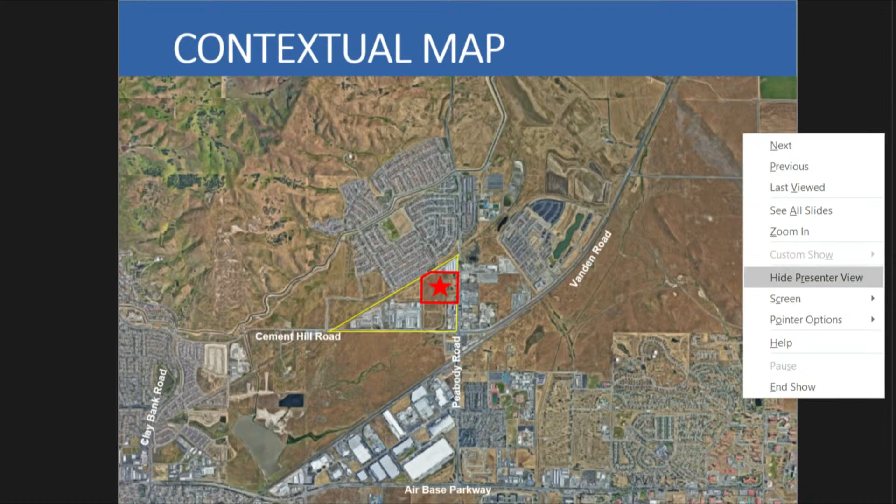I'll go to the next one. Here on the contextual map, you can have a better idea of where we are located in the city. You have Clay Bank Road on the left side of your screen, Cement Hill Road running along the yellow line there, and then you have Peabody Road running vertical up the center of the screen. Here we are, and Air Base Parkway on the south end.

Some key markers for you: the new train station that just opened, the Fairfield Vacaville train station, is at this corner of Peabody and Vanden. There is the new One Lake Park that's just recently constructed. Additionally, you have Vanden High School and Golden West Middle School. On the bottom of the screen, there's the Parker Road restaurants. And then, of course, just off screen, we have Travis Air Force Base.

Before starting the presentation, I wanted to provide a slide of acronyms, since I'll be using a lot of them this evening. I did this for you guys two weeks ago, hopefully it was helpful. So just a few on the screen there: TSSP for Train Station Specific Plan, PA for Planning Area, MPUD for Master Plan Unit Development, and EIR for Environmental Impact Report.

Before jumping into the project details, I'd like to give a brief summary of the Train Station Specific Plan project as a whole. I mentioned a lot of this information at the last Planning Commission meeting where the Commission approved the PA1 MPUD permit, but just to make sure we have a good foundation, I'll do a very quick overview.

The Train Station Specific Plan is a master plan for approximately 3,000 acres in the northeast area of the city. The plan was approved by City Council in July of 2011. Concurrent with the adoption, the Council also certified an EIR that evaluated resource impacts for the entire project, such as traffic, wetlands, biological habitat features, and more.

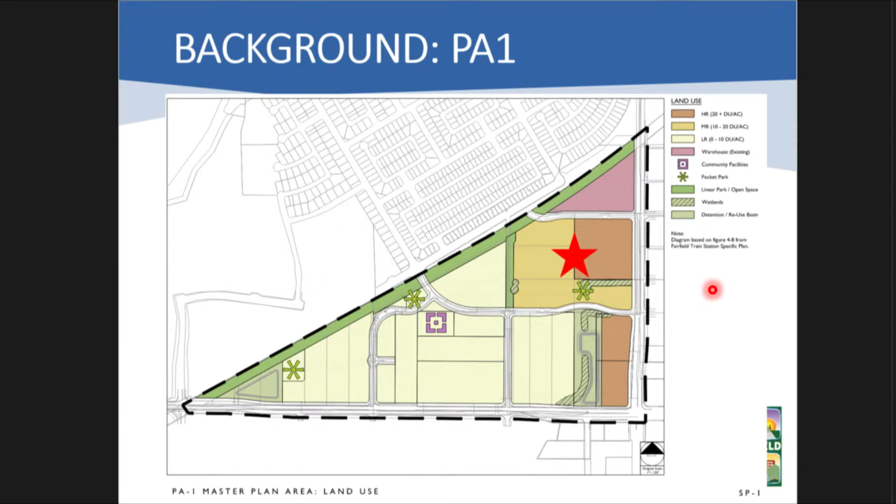As I just mentioned, Planning Area 1 was approved two weeks ago, and the project this evening is located within PA1. Our applicant, Republic Urban Properties, is the same group that facilitated the MPUD for PA1, and their project-specific site is starred on the screen within the MR and HR zoning designations, MR being Medium Residential and HR being High Residential. The project site is zoned TSPD with an associated general plan designation of Specific Plan Area, Train Station Specific Plan Area 1.

The project has three application components, the first being a tentative subdivision map. This will create 123 lots for residential buildings, private roads, amenities, and the pedestrian realm. I'll get a little deeper into all those components as we continue.

The second component is the development review. This is essentially for the physical construction of the project, so that would include architecture for the proposed 346 townhomes, a total of 81 buildings, which includes an amenity building as well, and associated landscape and infrastructure throughout the site.

The last portion is the environmental review. The Train Station Specific Plan has an EIR document that outlines several different mitigation measures that must be implemented. The MPUD for Planning Area 1 fine-tunes that specifically to PA1, and this approval would fine-tune it specifically to the Aviatrix project, should you pass the resolution tonight.

Starting with the tentative subdivision map, the project site is currently two legal parcels, and the application requests this map to create 123 lots. On each lot there would be either a residential building, a private road, an amenity, or the pedestrian realm. The pedestrian realm is essentially the perimeter of the project's sidewalk and landscaping. Per the specific plan, the pedestrian realm must be its own parcel, to facilitate ownership and maintenance through an HOA or property owners association.

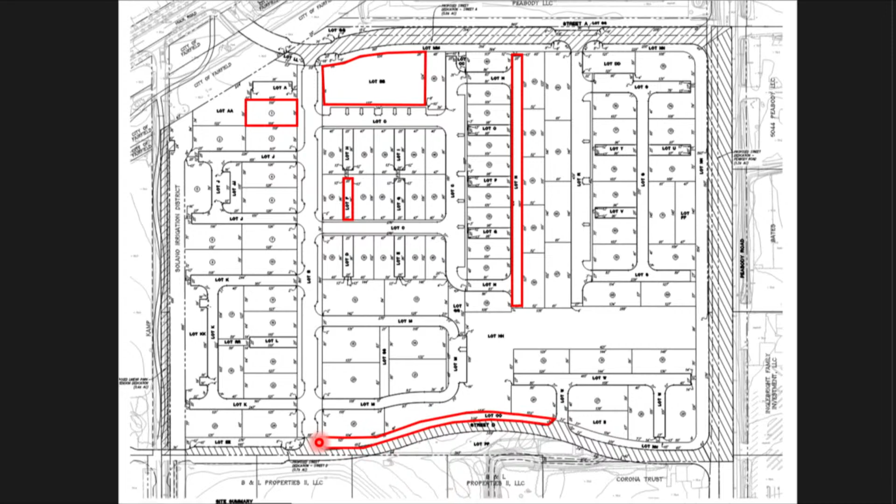This longer stretch here is a private or internal street, so all the streets are also lotted. And then at the bottom here, this would be an example of that pedestrian realm. At the top and bottom of the screen, you have Street A and Street D, which would be created with this map.

The blue square that just appeared would be the widening of Peabody Road. And then these two green parcels identified are the Linear Park Noonan Lane segment and the Wetland Pocket Park.

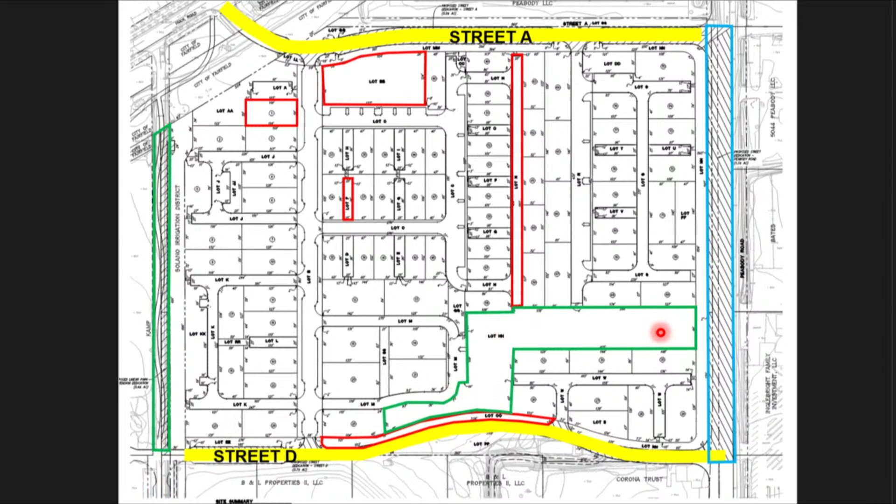So some key conditions to highlight when looking at this map. Staff has evaluated the map in terms of when things need to come on board for public works review. So at the time that a final map is submitted, should the commission approve this project, the next step would be for the applicant to process this map. And that process includes submitting final maps and legal descriptions, a whole slew of legal documents for review.

So several of these conditions would be required at the time of that submittal. And then the last portion of that process would be recording the map, making all of these properties real, all 123 lots real. And so several of these conditions would be required at the time of that recordation.

So just to quickly go over them, we are requiring that there is an emergency vehicle access plan. So with the submittal of the map, the applicant must identify emergency vehicle access at all times of the project's construction and phasing. We are also requiring that there are public access and utility easements recorded across various areas of the project site, and this is to allow for the city to maintain different utility lines.

Additionally, as I mentioned earlier, the specific plan requires that there is an HOA, or a property owners association, recorded for the entire Planning Area 1. That was part of your MPUD packet two weeks ago. Republic Urban Properties and the Aviatrix project, being the first project to come forth, are then responsible for establishing this association.

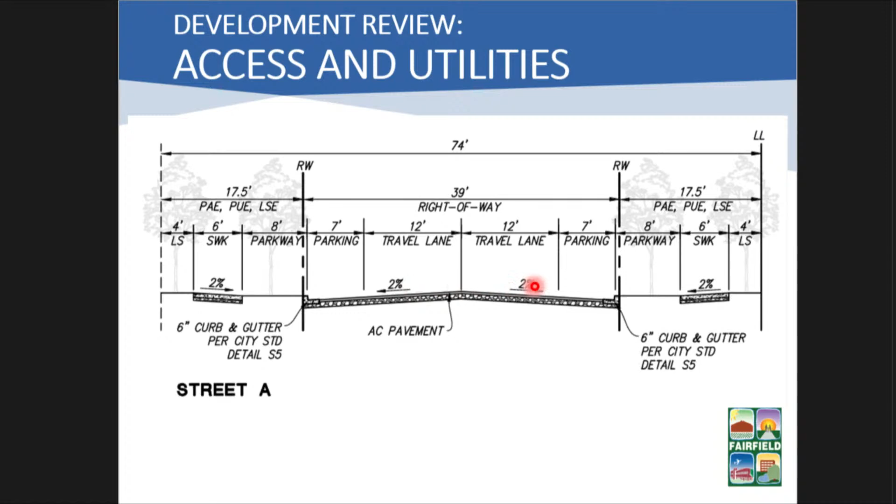Looking at the access, this is a cross-section of Street A. I wanted to show what Street A would look like at build-out. There will be 4 feet of landscaping, a 6-foot sidewalk, another 8-foot parkway or landscape strip, street parking, and travel lanes, one lane in each direction, closing out mirroring the other side of the street.

For Street D, it's very similar with landscape and parkway strips. However, you'll notice there is a 10-foot multi-use trail rather than the 6-foot sidewalk. This trail is part of the train station specific plan and part of a greater circulation network. If you're in Planning Area 1, you could take this trail and travel through Planning Areas 2, 3, 4, etc. Ultimately it could lead you to the lake park currently under construction, and at full build-out to the Great Park in Planning Area 7, or the Matt Garcia Community Park as it's been recently named, and of course it can bring you to the train station.

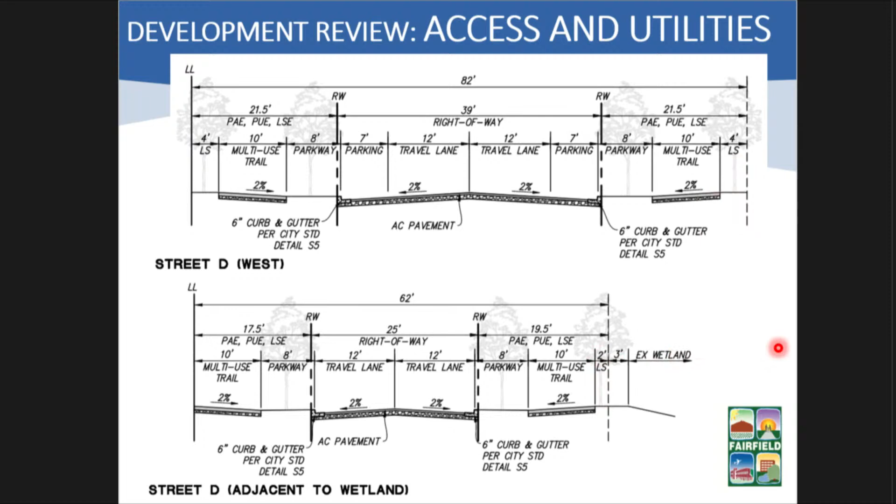There are two different cross sections here for Street D. You have the regular Street D cross section at the top, which is the larger 82-foot width, and a smaller section adjacent to some wetlands. The project site does have wetlands on it, and in order to avoid those wetlands, the cross section gets a little smaller and waves around that wetland spot. The landscape that's 4 feet on the regular section drops off and also gets a little smaller on the other side to accommodate the avoidance of the wetlands.

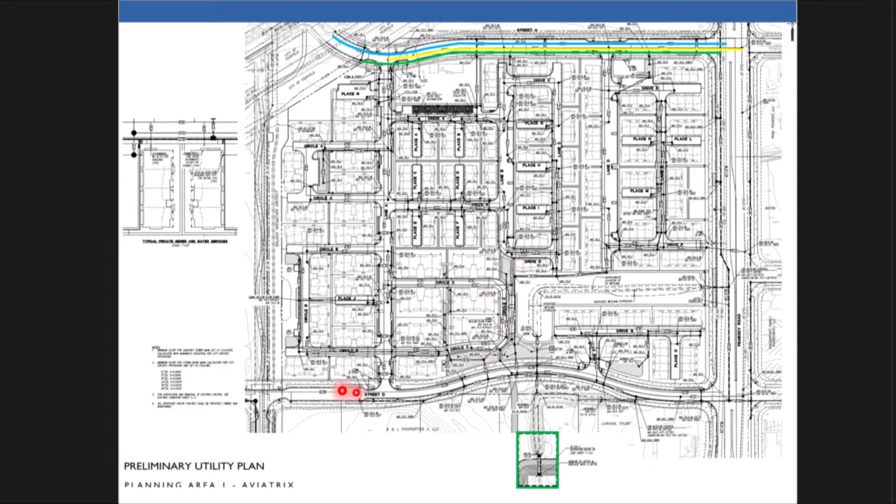This is the utility plan for the project. Utility plans can be very overwhelming to look at, especially if you're not an engineer like myself - I pick on my coworkers to help me read these. The project will have various private utility lines that connect into public lines in Street A, Street D, and ultimately Peabody Road. Because the screen is so hard to read, I highlighted an example area of some lines: that's Street A at the top, with the blue line being water, yellow line being sewer, and green line being storm drain. There are lines throughout the project connecting into the public lines.

This screen shows the architecture site plan; there are various versions of the site plan. This plan identifies that there are 346 units, and gives the breakdown of densities per development area. Recall that with the Planning Area 1 MPUD, this site has an MR, medium density residential designation, and an HR, high density residential designation. Within that MPUD permit, there are allowances for a density transfer, which ultimately allows this project to be developed at a 14.8 units per acre overall density. What's proposed here is consistent with the MPUD permit approved two weeks ago. The different coloring for the buildings shows the variety of building types proposed for the project.

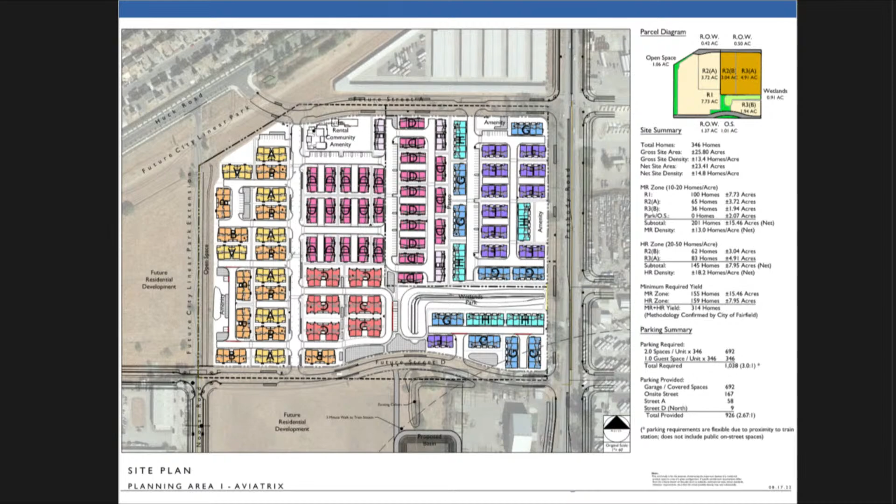On this slide, I've broken down the various building types. There are 8 building types, A through H. Depending on your building type, you're looking at an attached residential building of 4, 5, or 6 units. And depending on that building type, it's either a 2-story or 3-story building.

The smallest unit is 1,311 square feet, and the largest unit is 2,205 square feet. It ranges from 2 bedrooms to 4 bedrooms with 2.5 to 3.5 baths. The last column identifies the number of each building that is lotted throughout the plan.

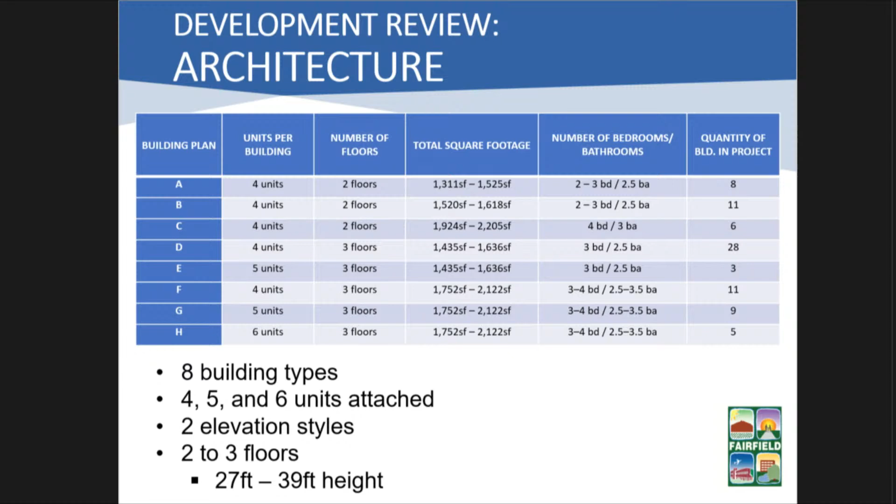So for architecture tonight, because there are 8 building types, I didn't want to belabor the presentation showing you all 8. So what I did is select 3 examples, chosen to show you both 2-story and 3-story buildings, and the building types that are most lotted throughout the project, so these are the ones you would see most.

Starting with building B, this is the most lotted 2-story building. I know it's a little small on your screen, but you have 2-car garages for each unit, your kitchen and living room space, and upstairs your bedrooms and bathrooms.

There are 2 elevation styles for every building type. This is the first style, contextual agrarian, shown as the front-facing elevation. At the top of the screen is the rear for that same building, along with the left and right sides.

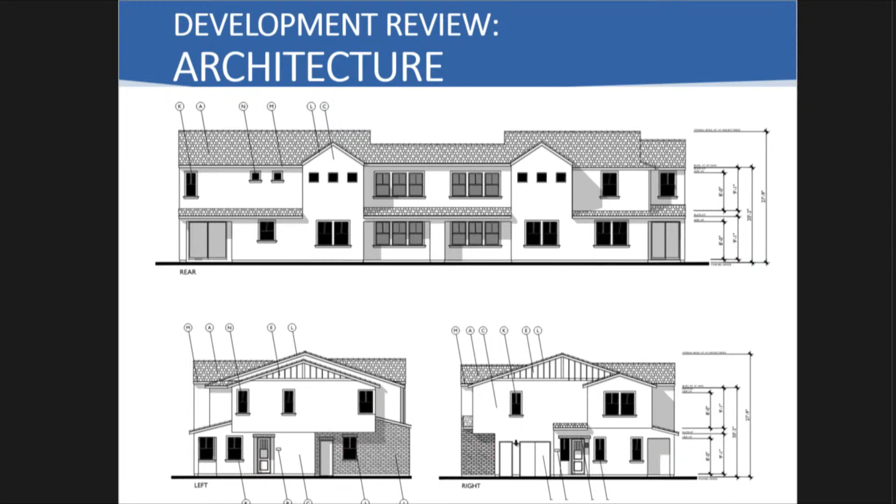This is the second architectural style. Same exact floor plan, same building, but with a different architectural style for the transitional Californian.

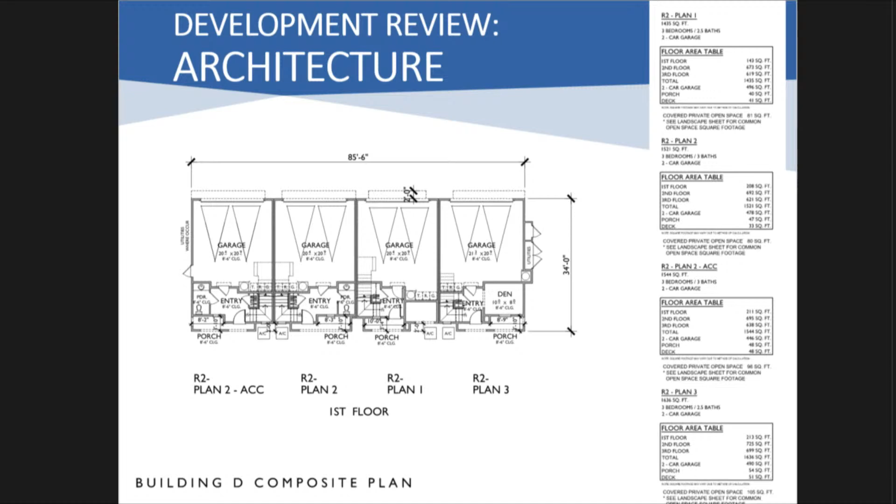This is building D, the most lotted 3-story building and the most lotted overall within the project site. It's 4 units attached. First floor has the garage, den, and entry. The second floor is your kitchen, dining, and living. The third floor has the bedrooms and bathrooms.

Here is Building D in the contextual agrarian style, with rear and side elevations. And Building D again in the other architectural style.

Lastly, I have Building H. This is not necessarily the most lotted plan, however it's the largest plan, with 6 units attached. I wanted to show you the largest building in terms of massing.

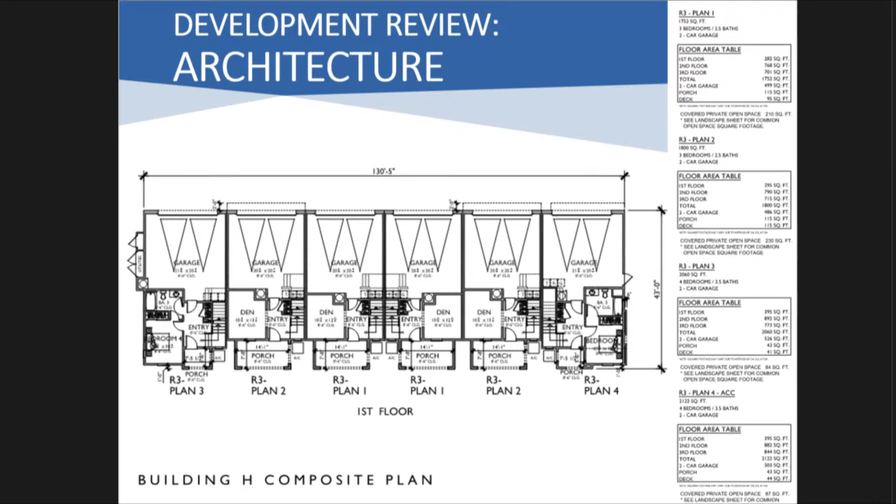First floor again has the garage, den, entry, and bath. Second floor is kitchen, dining, living. Third floor has the bedrooms.

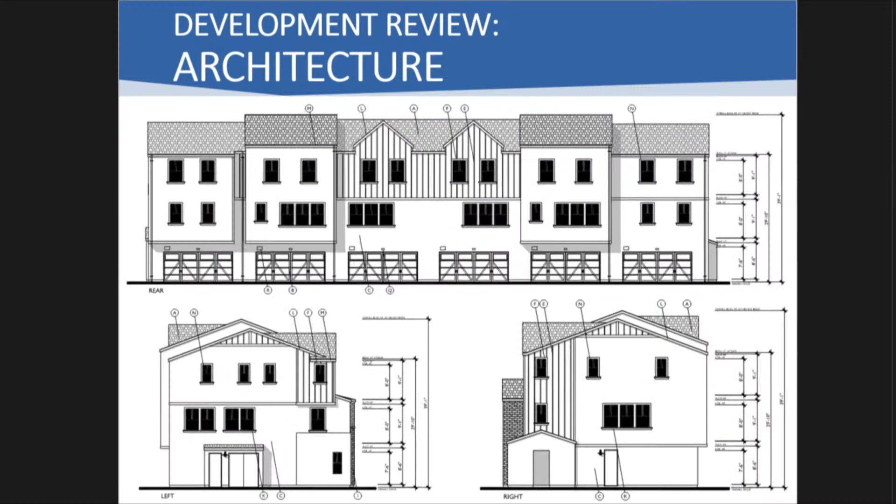Front elevation in the contextual agrarian architectural style, with rear and side elevations, and the building once more in the transitional Californian style.

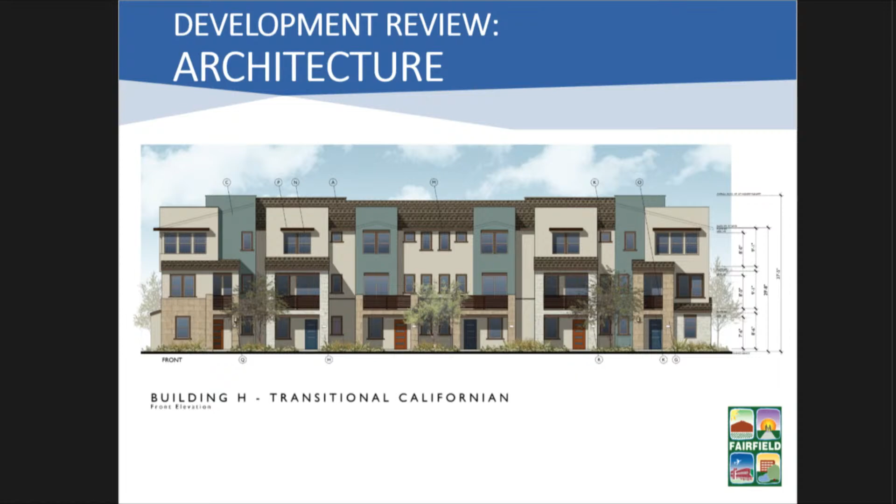You'll see that all these buildings employ a variety of roof lines, architectural movement, and construction materials. If I flip between transitional Californian styles, you'll see color schemes and materials changing, and the pitches and roof lines changing. So it gives a good complementary architectural style, but still provides variety within the overall project.

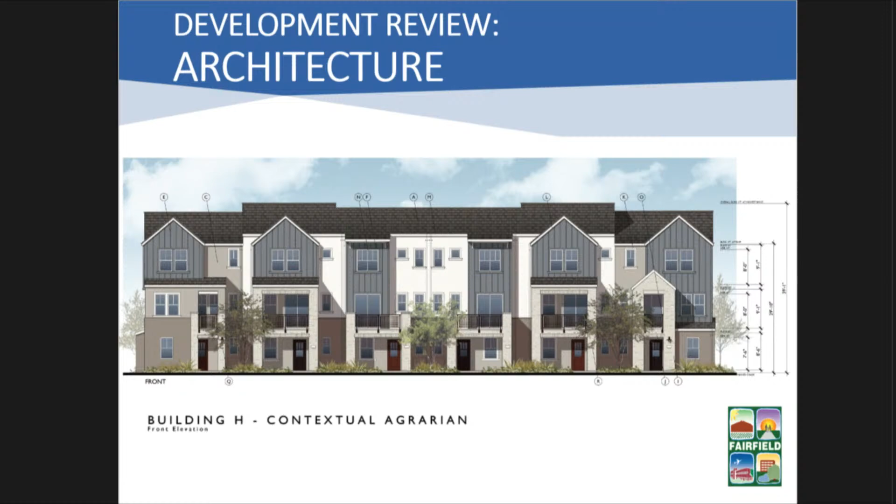In addition to the residential buildings, there is a recreational building proposed on the project site. This is the floor plan for that rec building, with a lobby, fitness center, and a club room with outdoor courtyard.

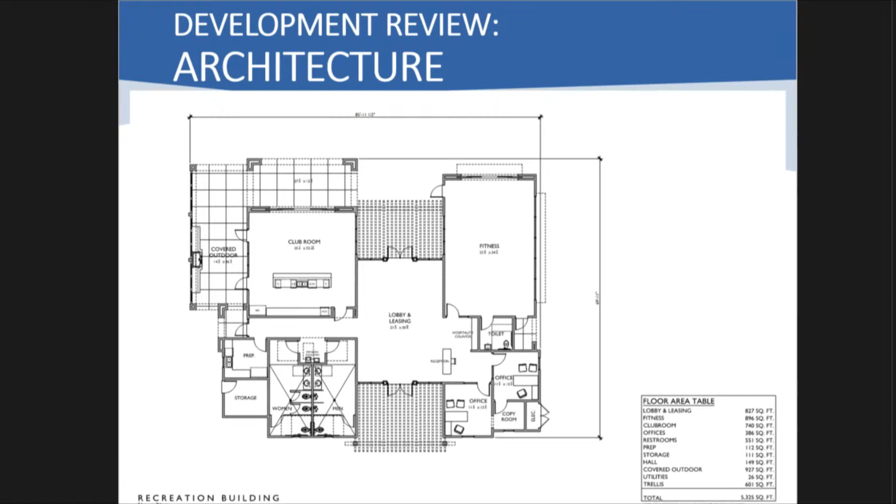The recreational building is part of a larger amenity parcel, as we identified earlier, and I'll get into that deeper when we touch on amenities. Here is the front elevation for the recreation building, matching the contextual agrarian architectural style.

Similar materials are used, and you'll notice these building materials actually transverse the entire elevation. For example, the stone here doesn't stop at the base, it goes all the way up to the roof lines, and same with the wood paneling there.

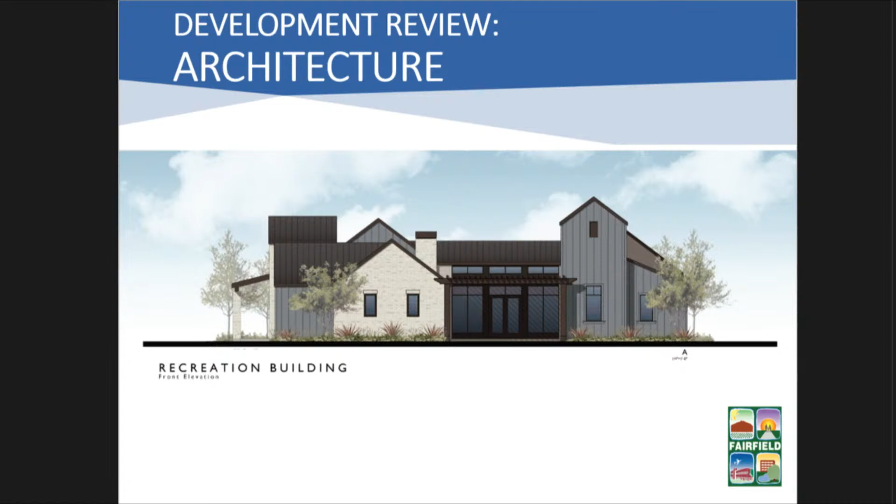This gives us a good segue into the amenity portions of the development review. Per city standards, every multifamily project over 150 units is required to provide 2 major amenities and 2 minor amenities. This project has provided more than that.

You can see they've provided a recreation building, which would be considered a major amenity. The pool and spa would also be considered a major amenity. Pickleball courts, 2 playgrounds, a dog park, community garden, and plaza space would qualify as minor amenities. The dog park could tip into a major amenity based on scale.

So they have definitely met the standards of providing the number of amenities required. In addition to amenities, the project is required to provide common open space.

The Train Station Specific Plan has specific percentages for open space for the MR and HR densities. For MR, 16% of the net project area must be dedicated to common open space. For the HR component, 25% must be dedicated to common and private combined. What the project is providing is 11% common area open space and 13% common and private open space.

Here I have an illustrative site plan, which comes from the landscape plans. I joke that the civil ones are hard to read—these ones are my favorite. They're colorful, you can tell where the buildings go and where the trees go. I just wanted to give that overall view.

We'll dive into the different amenity areas, but here is your rec building, a playground, and the community garden. This is the Wetland Pocket Park, this is the plaza seating space, and the dog park is up here. There is a second playground and the pickleball court tied to the side of the community rec building, plus a pool and spa area, and lastly the linear park Noonan Lane segment.

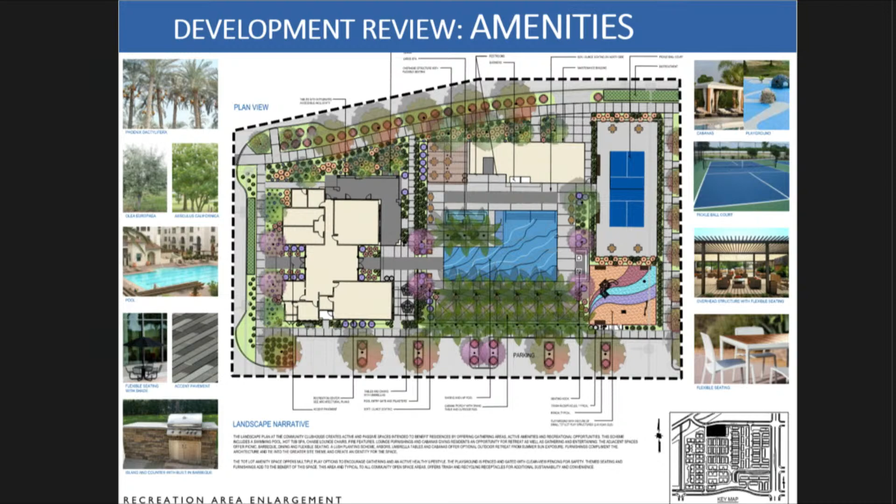Coming in a little tighter here, we have the recreation building, pool and spa, playground and pickleball—this would be your bulk amenity, if you will, within this project. This is the secondary playground area.

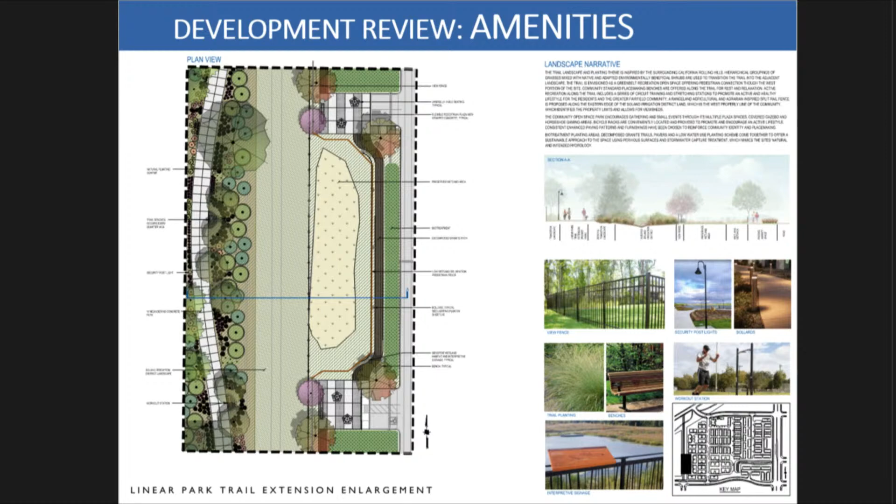Shifting to the plaza, this particular amenity area is actually adjacent to the linear park Noonan Lane segment, so it feels as if it's an extension of that park. Here we have the community garden—you can see some of the site furnishings include gazebos, park benches, and different picnic areas as well.

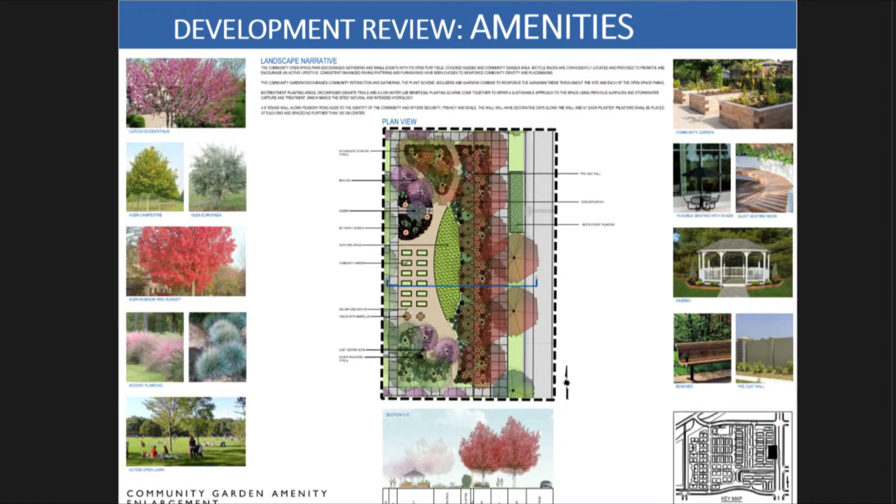Concluding the amenities and looking at site improvements, as I mentioned earlier, we've got parking, landscape, and stormwater to consider. For parking, city standards require a total of 742 parking spaces—that's 2 spaces per unit plus 1 space per every 7 units, with that 1-per-7 dedicated for visitor parking.

The project is providing 945 spaces. Every unit has a 2-car garage, giving 692 spaces from garages. There's also 167 on-site parking stalls, and then 86 off-site or street parking spaces along Street A.

For landscaping, the plans include internal front yard and courtyard typicals, showing roughly what the yard space would look like for the various building types. There's also landscaping for all the amenity areas, which we just breezed through, and landscaping along the streets—Street A, Street D, and Peabody.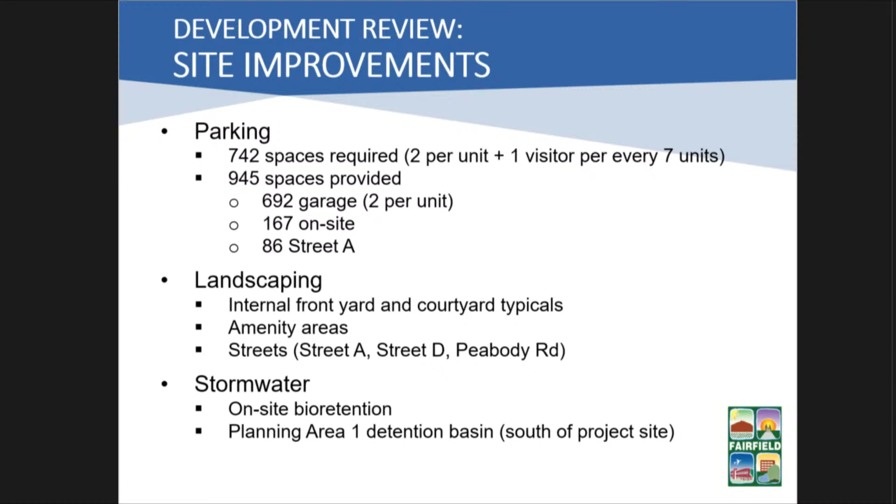For stormwater, the project site has various on-site bioretention and stormwater quality features. All of those collect runoff and ultimately feed to the Planning Area 1 detention basin, which is off-site on a southern parcel from the project.

Pulling back up the site plan here, I've got a few markers again—a little hard to see, but those are your on-site parking in red. Very hard to see, but there are little yellow triangles on the screen; those are the different stormwater quality features.

And then here we have typical A for front yard landscaping. So depending on the building type and the way that they're lotted, whether the resident is accessing the garage from a private courtyard or from the private road, the landscaping varies. This one is showing access off a private alley, so your front yard landscaping is essentially facing away from that internal driveway.

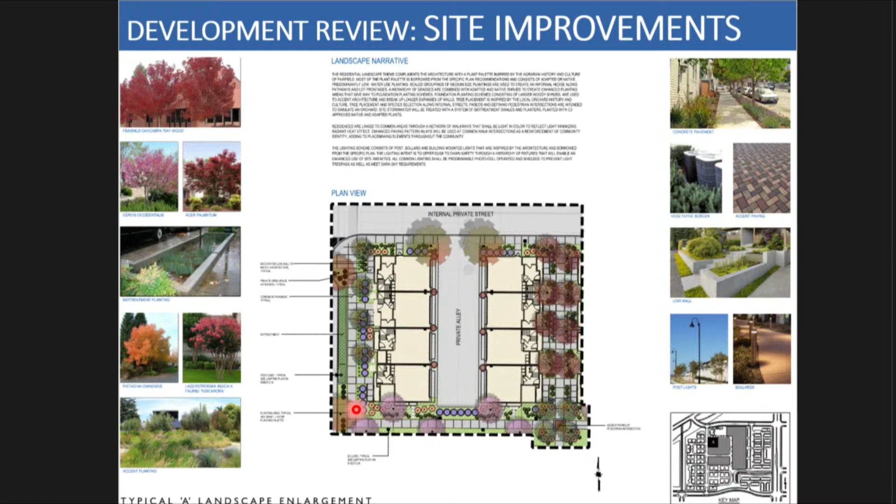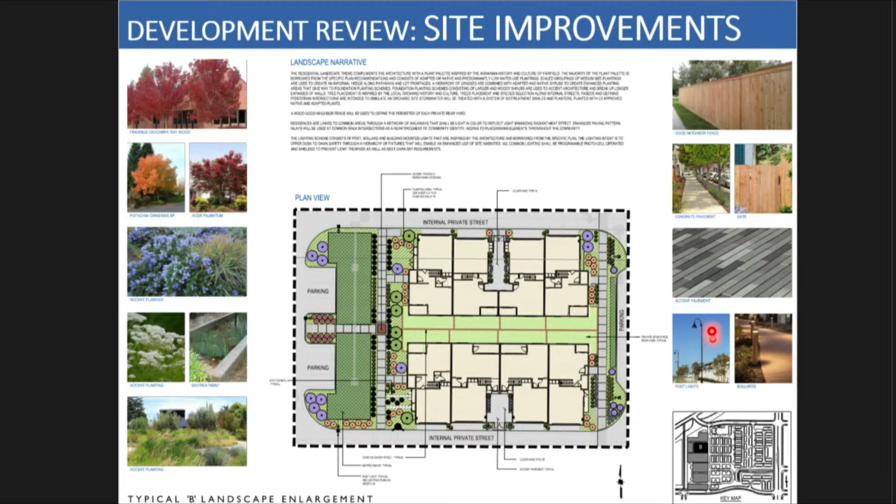Here is a typical B. This one's a little different. For this, you would access your garage off of the private street, and then you would have essentially an open space courtyard, and landscaping on the edges.

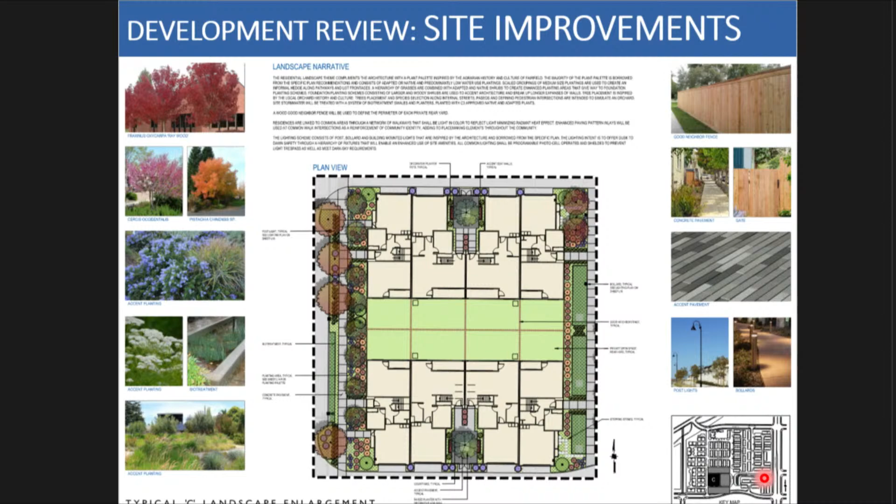Typical C, kind of similar, just a different building type, so a different floor plan. But again, you've got that shared common open space in the middle, landscaping on your edges.

And then lastly, typical D. This is where your front door is actually internal. You're facing your neighbor's door to door, and you've got this nice landscaped plaza court that you share for pedestrian access. Your garage access is at the rear off of an alley.

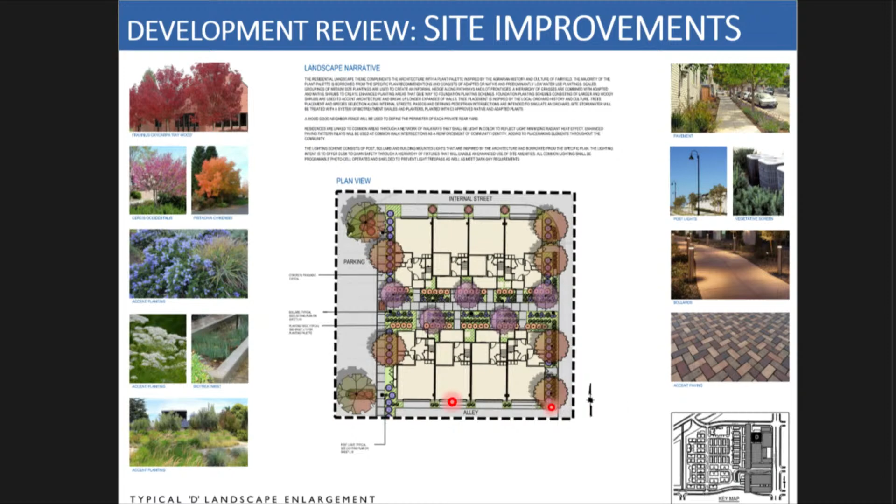Still focusing on site improvements, this is a hydrozone plan, so this does a much better job than my little triangles to show you where all the stormwater quality treatment areas are. Those are highlighted in the dark green.

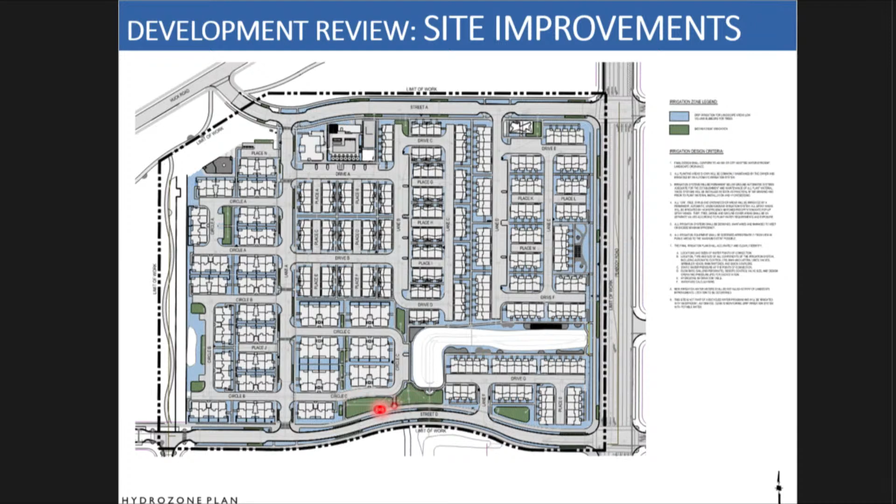As I mentioned before, the stormwater will ultimately feed to a large detention basin, which is off-site on a property to the south of the project. With the Planning Area 1 MPUD, whoever develops first east of Noonan Lane must build this basin. So Aviatrix, being the first project moving first, is responsible for building the basin.

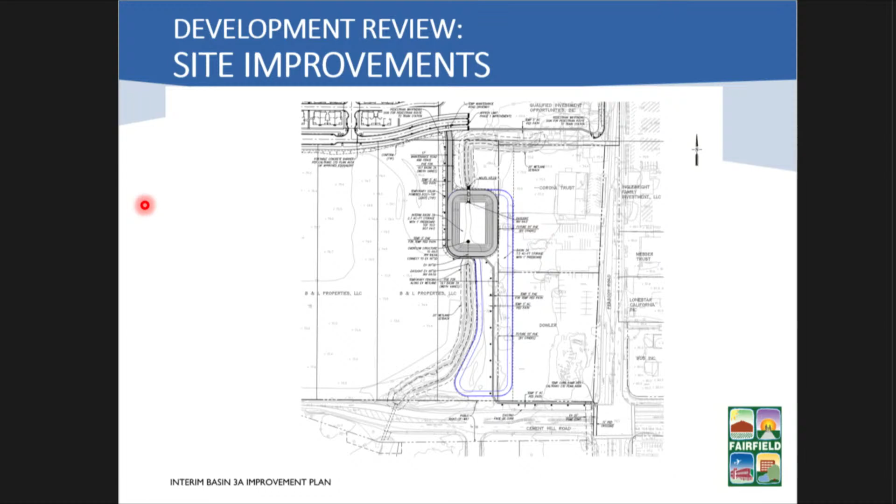In addition to the on-site improvements, the project is conditioned to provide off-site improvements as well. Again, this is consistent with the specific plan and the MPUD. So just quickly listing the off-site improvements required.

The project is conditioned to widen Peabody Road, only on the portion of their project frontage. At the moment, it is one lane on that west side of Peabody Road, and at full condition it would be 3 lanes. They are also conditioned to install traffic signals at Street A and Street D where they meet Peabody Road. We're also requiring signal modifications and striping at Cement Hill Road / Vanden Road.

Cement Hill Road turns into Vanden Road as it passes Peabody, so at that intersection we are requiring signal modifications and striping for pedestrian movement to access the train station, which is my next bullet, temporary pedestrian improvements. Of course, the basin that we've been talking about, and the parks, the Wetland Pocket Park and the Linear Park Noonan Lane segment.

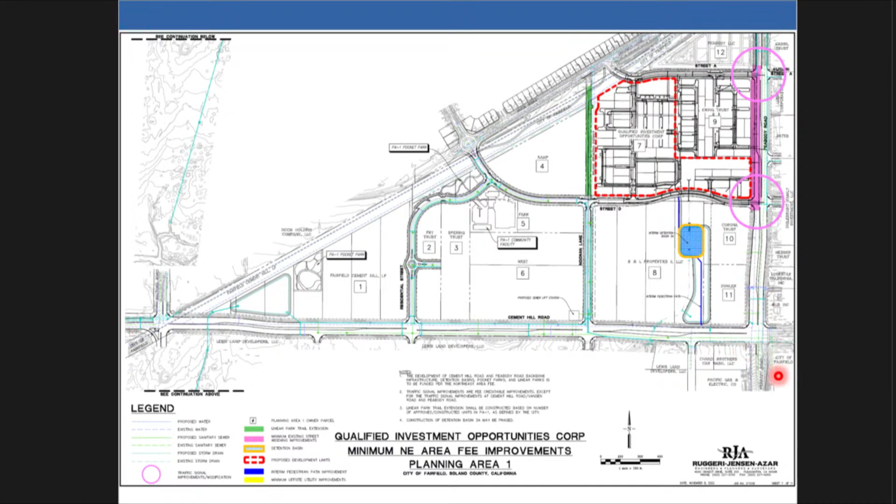There are some playground equipment proposed, exercise equipment, bocce ball courts, anything that's the right sizing to round the perimeter of the wetland pocket park. Additionally, to nod to the wetlands, there will be some educational signage to describe to anybody who visits the park about the habitat and the species that exist within this area.

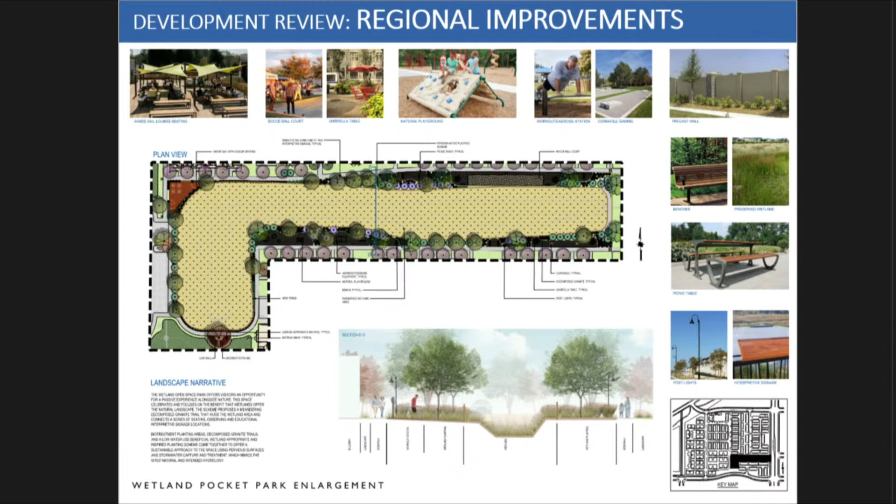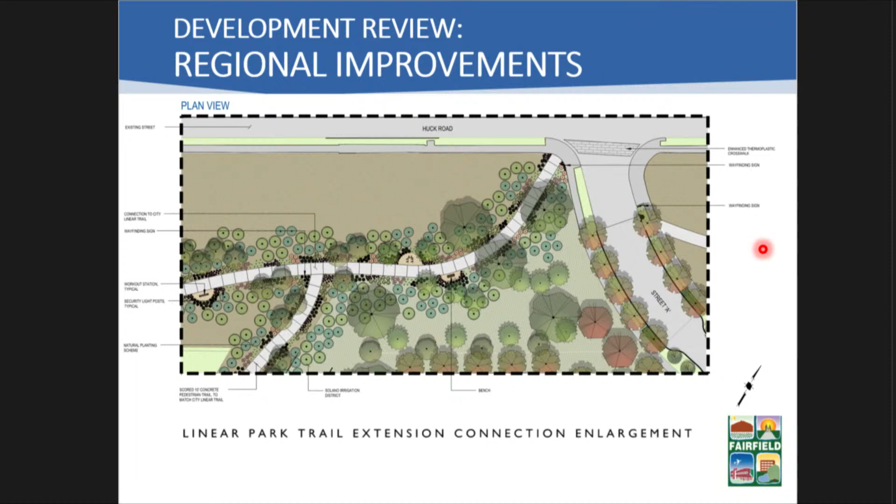This is an enhancement of where the linear park trail connects to the project site. Per the conditions of approval and the review that staff has done with the applicant team, the linear park conceptual phasing will come at a later date. So this detail here just gives us a snippet of what would be included. I know the text is a little hard to read, but essentially you would have more benches, more exercise equipment, of course the pathway, and landscaping along the way.

Coming to the last component of the development review, the phasing plan. The applicant is proposing 2 phases to construct the project. Phase 1 would include 227 units.

Phase 2 would complete the project and is a smaller phase, with 119 units. It will complete Street D, complete the widening of Peabody Road, and include the Noonan Lane segment and Wetland Pocket Park.

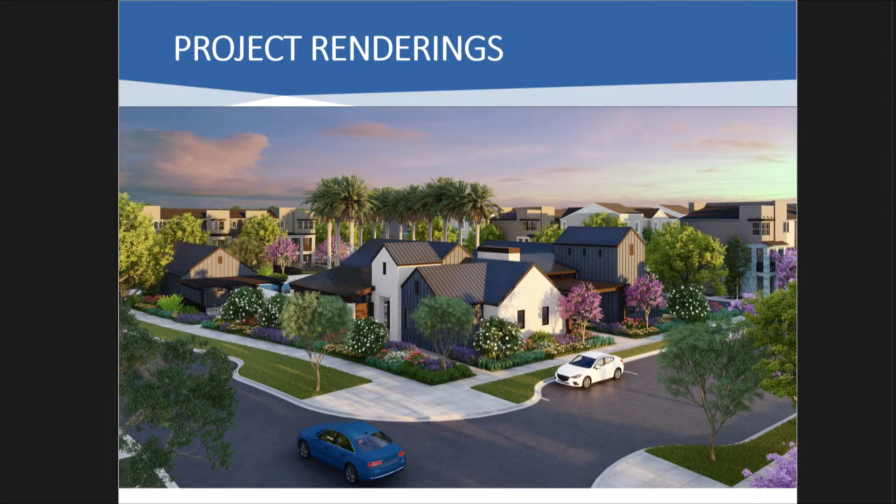The next few slides are project renderings prepared by the applicant. This is looking into the project internally, and here's an overhead view. This overhead view also shows the other parcels within the planning area developed, so this would be a long-term vision, if you will. But the project site itself is the sunny side.

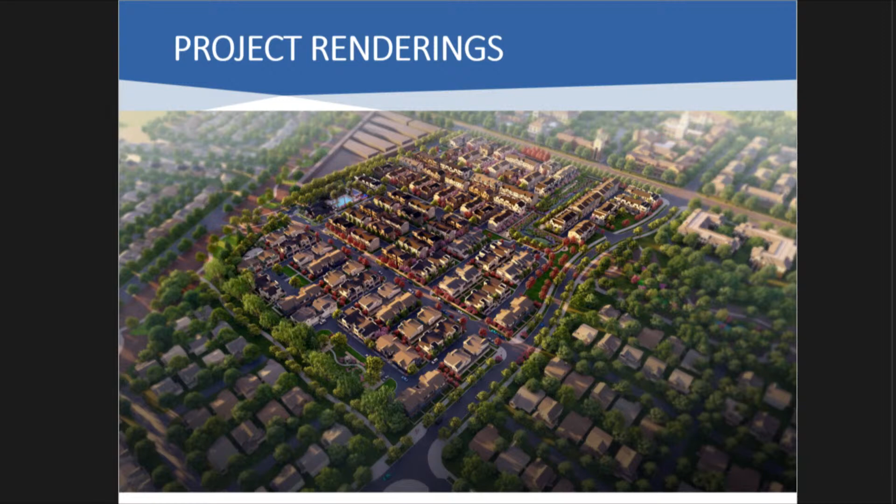The very last component of the project application before you today is the environmental review. As previously mentioned, the specific plan has an EIR that was certified with it. Notable mitigations for this project include coordination with the U.S. Army Corps of Engineers, the San Francisco Regional Water Quality Control Board, and the California Department of Fish and Wildlife. Although they are avoiding the wetland components, there are still different processes and permits that must be undertaken with these regulatory agencies.

For the Department of Fish and Wildlife, since the majority of the site is vacant, they will have to conduct pre-construction surveys for different special status species. The last point to mention is that there have been no additional impacts identified that weren't already identified in the EIR.

With that, staff is recommending that the Planning Commission adopt Resolution 2023-02, granting approval of the tentative subdivision map and the development review. I'm more than happy to answer any questions you might have.

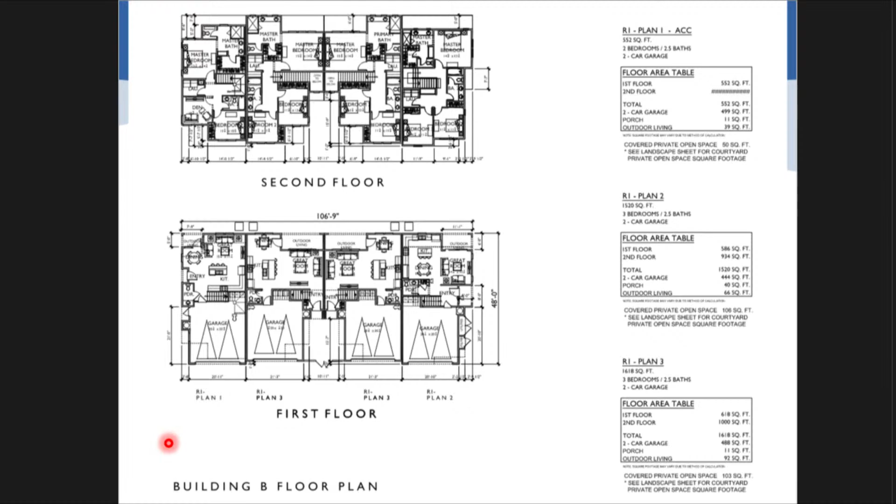Is that just some of the buildings, or most buildings going to have a patio? Every building will have the private patios I'm highlighting here and/or balconies, and then depending on the lotting, you would have the courtyard space.

Thank you. Anyone else? Ms. Sheehan, once again, excellent presentation.

Can you go to the slide where you have Phase 1 and Phase 2 and shows the off-site improvement? So am I correct in understanding the widening of Peabody would be in Phase 2?

The widening of Peabody is actually in both phases. I would defer to our civil engineer, Alvin Lay, to give a better description of how that works out. Alvin, would you also please address how you anticipate the striping of that area as it relates to both east and west, north and south, based on the vertical?

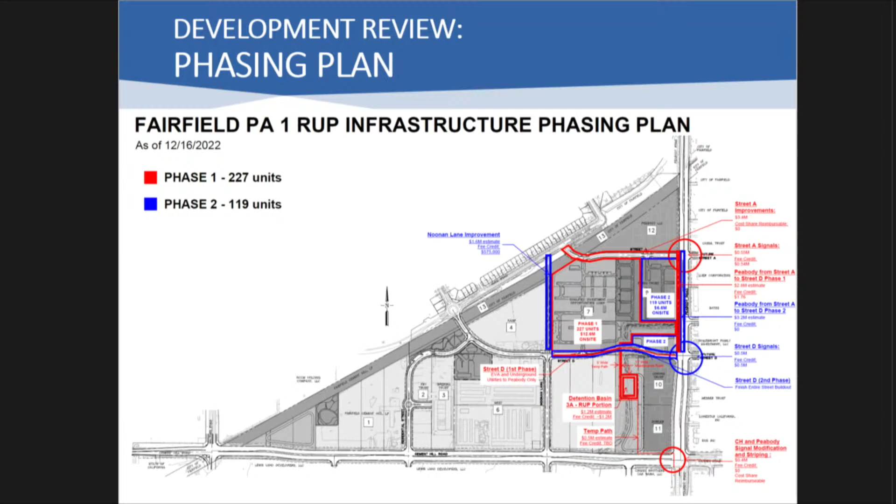Excuse me, sure thing, Commissioner Matthews. Good evening, planning commissioners and members of the public and those viewing online. My name is Alvin Lay, and I work for the City of Fairfield Public Works Department. I think the best way to start looking into your question, Commissioner Matthews, is to provide some context for the Republic-specific project and dive into the phasing that will be required as their project develops.

Maylee, could I ask for your help on this please? Can you move the slide over to the visual that shows the overall project as well as Street A and Street D highlighted? Thank you, let's see. Make sure I know what you're asking for. This one? This one works. Thank you.

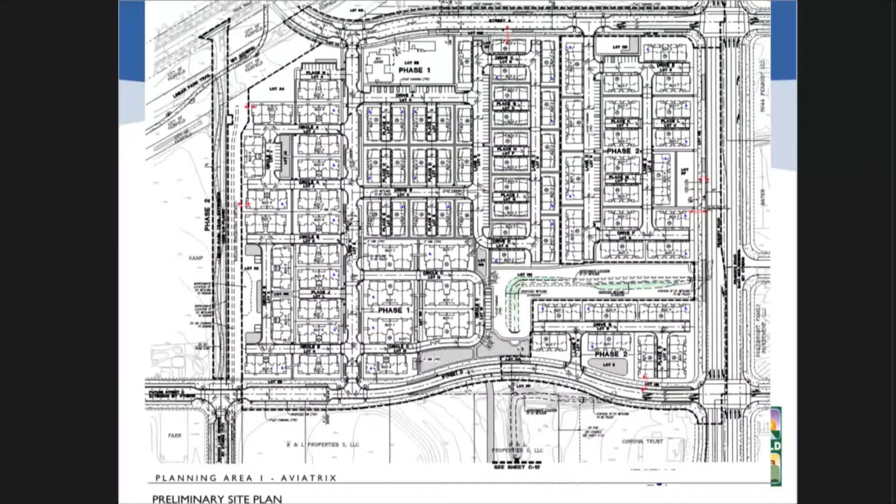So I know the question was regarding Peabody Road, and I assure you we'll get down to that discussion. But to provide some context on Republic being the first development within the MPUD to construct, and some insight on their requirements: before Phase 1 of Republic's project is allowed their first resident, their first certificate of occupancy, Republic is required as part of their project to fully construct Street A, which you can see on the top side of the screen here, which will connect to Huck Road as well as Peabody Road. Street A, the roadway, the utilities, all of that needs to be fully constructed and operational before Republic is even allowed their first resident to live out here in Phase 1.

With Street A, the segment of Noonan Lane that exists today between Street A and Street D will be closed off to the public. So now residents within Gold Ridge no longer need to travel on Noonan Road to get to a major arterial, Peabody. They will have a fully improved Street A to travel from Gold Ridge to Peabody Road and then towards Interstate 80 or wherever it is they'd like to go.

In addition, Street A will also be Republic's primary and only access to their Phase 1. So Noonan Lane north of Street D will not be accessible to Republic's future residents, and it will not be accessible to the Gold Ridge residents either. All of that traffic will be quickly facilitated towards Peabody, which is intended to carry that amount of traffic.

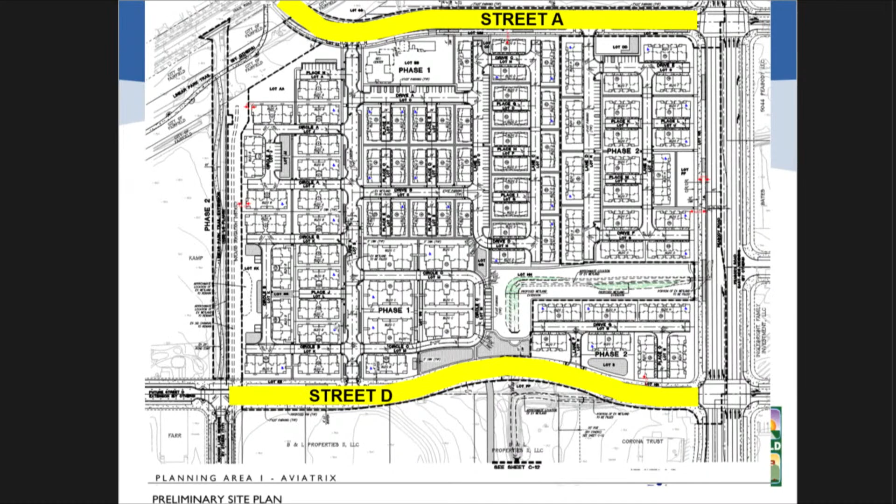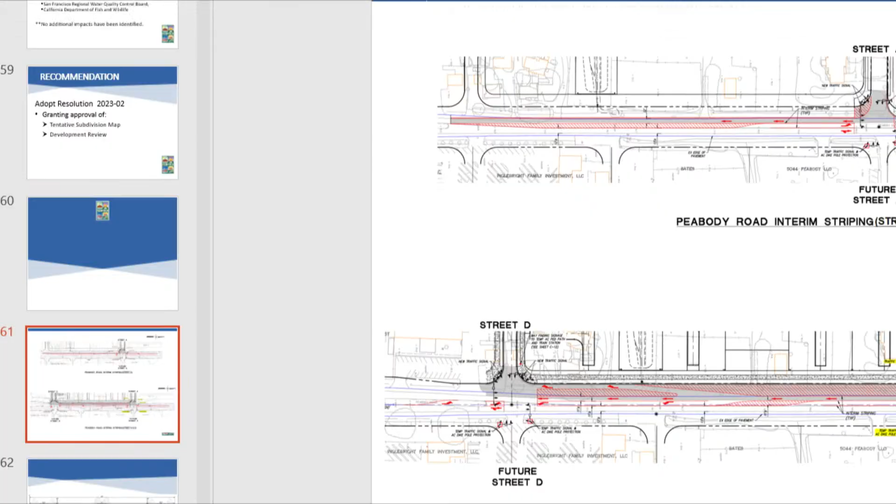While Maylee's looking for the exhibit showing the intended striping for Peabody Road, I want to amplify that in the MPUD, the requirement is that future residents within the planning area will have safe and adequate access from any development within Planning Area 1 to the train station. Republic is also required to construct pedestrian pathways or improvements, including wayfinding signage, to guide residents along either a temporary access road or pedestrian pathway, or along the completed and improved Peabody Road sidewalk.

So getting back to your original question, Commissioner Matthews, about the Peabody Road widening improvements and the phasing - it's a little difficult to see on top here, but this image depicts what Peabody Road improvements are needed to support Republic's Phase 1 of development. What you'll see in gray is the additional pavement Republic will construct to widen Peabody Road. You can also see the traffic signals pointed out here.

To speak towards the striping, when Peabody Road is widened, the southbound lane will be split into two travel lanes. One will provide right turn access into Street A going southbound, and it'll also be the lane that provides cars the ability to travel through that intersection as they head south towards the train station. After this intersection, these lanes will continue, and the striping will keep vehicles in their two travel lanes through this segment.

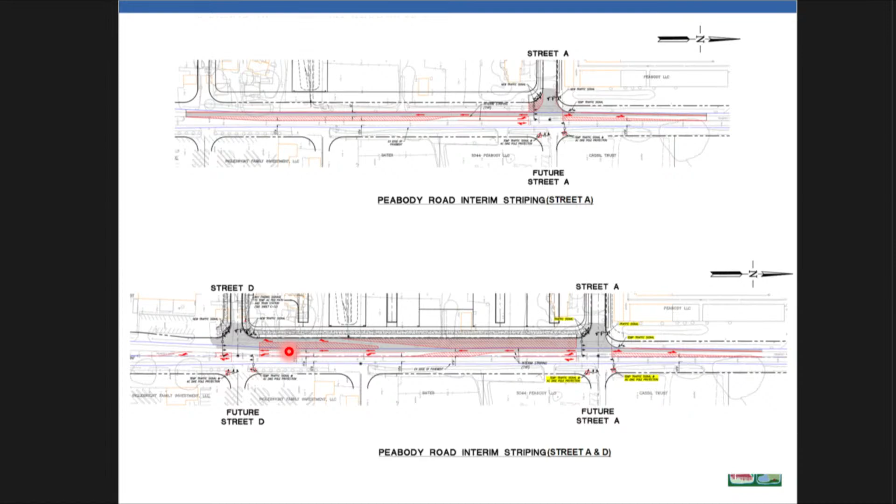So just to clarify, whether it's north, south, east, or west, you're still going to have one through lane each way, with the addition of right and left-hand turn pockets. Is that correct? That's correct, yes. Okay, I feel much better about that layout relative to the comments I raised at the last meeting. So thank you for taking the time to walk us through that.

No problem. I have a question regarding Noonan, because it was mentioned that Noonan is going to be closed. At our last meeting, it was brought up that we have businesses currently there, and that they were going to be allowed to remain - but if it's closed, will the public have access to those businesses?

Good question. Maylee's helping me pull up a Google Earth aerial, which will help provide a visual. But the short answer is yes, the existing businesses currently on Noonan Lane will still have access to their businesses off of Noonan Lane. As soon as we pull this aerial up, I can provide a little more clarity on that.

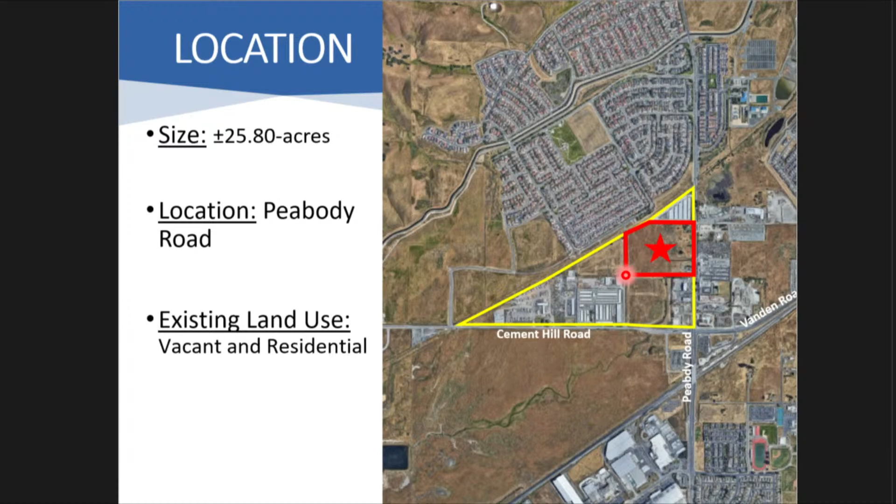Okay, that answers it. Thank you. And then I do have one more question.

Are any of these units going to be accessible for people with mobility issues? Because it's my understanding that a lot of them are going to have 3 floors, so I was just wondering if any of them are going to be accessible to people with mobility issues.

Yes, per the California Building Code, there are ADA requirements. I can't speak exactly to the full architecture of the buildings, but I know the applicant team is here, and I'm sure they could address that further. Awesome, thank you.

Okay, I have a number of questions, if I may, or comments. I'm in favor of the project, but reduced common areas - if we do that, isn't that going to impact either the width of the streets or those areas? If we reduce the common areas, how will that impact those people living there?

Sure. So to the first portion of your comment, the reduced common areas would not impact the infrastructure, so it's not going to impact the widths of anything. However, in terms of impacting the residents, if they met our zoning ordinance and train station specific plan regulations, they would probably have slightly larger balconies and slightly larger patio spaces. Additionally, they might have larger amenity areas like the pool, rec building, the community garden, etc.

Thank you, I have a follow-up question about the parking - because there's only one space per 7 units for visitors, correct? So is there a larger parking area for something like the clubhouse? There is parking along the frontage of the clubhouse - I know one of these slides has it. Sorry about this, one second. Let me grab my pointer. If you can see this stretch here, this is a row of parking. So it's not necessarily a parking lot, if you will, but there is parking associated with the clubhouse.

Okay, and I'm assuming that however that parking was developed, it was in conjunction with whatever the capacity is for that space. Because my understanding is there's going to be a clubhouse also there with the pool, correct? So if you want to rent that space and the capacity is 30, but there are only so many parking spots, I'm hoping that it corresponds. To be honest, I can't speak to whether that parking calculation was related to the capacity of the building. As I understand it, the applicant has provided our minimum parking plus some, probably per their own internal understanding of what is required for multifamily - I'm sure they could add more information to that. The only thing I can add is there would be additional off-street or off-site parking on Street A. So if you have a birthday party or something and all the spaces in your project site are taken up, hopefully there would be parking on Street A for them. Okay, thank you.

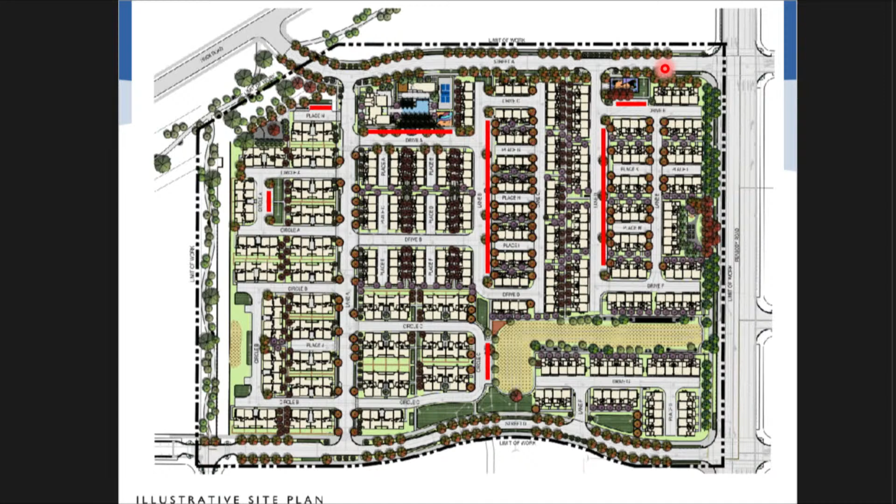So I do have a question on the traffic lights starting from Cement Hill, Peabody Road, crossing towards north, going to Vacaville. We're going to have one traffic light at the crossing of Peabody and Cement Hill Road, and the very next traffic light is going to be Street D, and after that Street A. And if we go further down, like in the last hearing, you guys said those mini storages are going to stay there. So what's going to be the access for the mini storage from Peabody Road? Is there going to be a stop, or how will people going from south to north get to that mini storage on the left-hand side of Peabody Road?

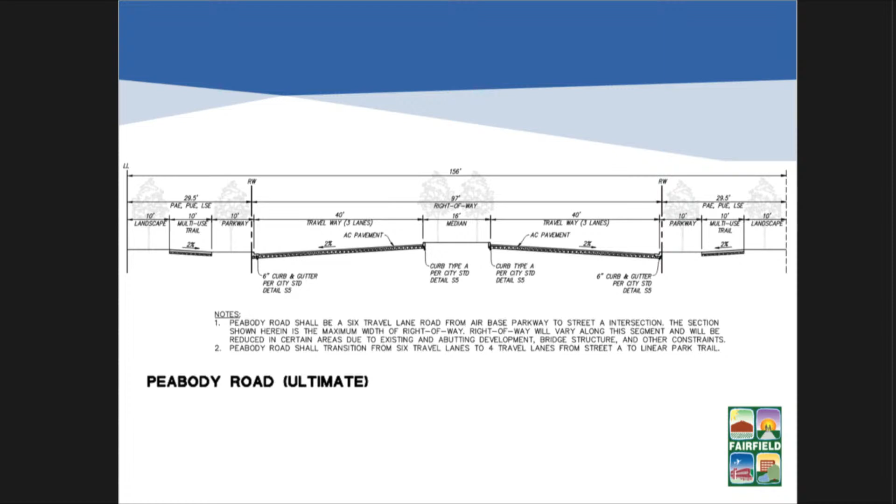Any other commissioners? Okay, so at this point, no other commissioners, no one online?

Okay, I'm going to now open the public hearing. And I've got a couple of speaker cards here. Okay, I'm going to go with Jared first.

Hi, Commissioners, thank you, good evening. My name is Jared Newmeyer, and I'm the current President and CEO of the Fairfield Suisun Chamber of Commerce. I'm speaking today in support of the Republic Urban Properties Aviatrix development. First and foremost, Republic Urban Properties is a member of the Fairfield Suisun Chamber of Commerce and is doing what they can to help support our local community at large. The development plan is expected, as we've learned today, to bring 346 townhome rentals to the Fairfield community.

That will bring amenities such as playgrounds, dog parks, walking trails, pool, clubhouse, solar, and other green sustainability features, just to name a few. During my conversations with their Director of Entitlements, Kelly, not only did he express excitement in this new build, but he shared how it would be bringing the city of Fairfield approximately $15 million in revenue, which would include the funds for widening a segment of Peabody Road, putting in new signals and pedestrian crossings, improvements that will allow easier access to the Capitol Corridor train station as well.

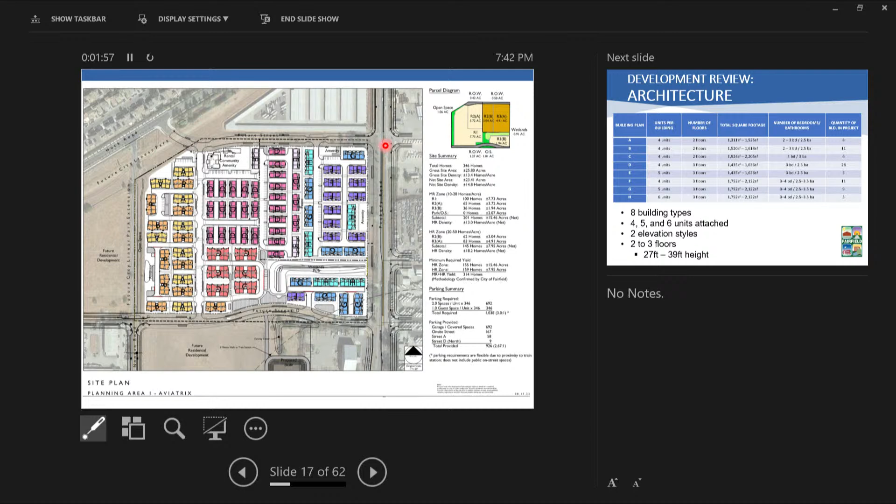Once it is open, then that Noonan Lane segment that will become park will close, but you will have Street A in its place with full brand new curb, gutter, sidewalk and streets, travel lanes. So the Street A segment will actually be in a much nicer condition than what the Noonan Lane segment currently is, much nicer than how Noonan Lane currently exists. So there will always be connection points for pedestrian and bicycle movement and circulation.

And I'll add some information since the first speaker asked about guarantees that conditions will be met. There are typically two control points that staff uses to ensure that the conditions the Planning Commission adopts are met. One is the point where either a grading permit or a building permit is issued by the city, and some of the conditions, as we review their plans, have to be completed before the city issues a grading permit or building permit. So staff goes through a detailed checklist with your conditions to ensure that the ones tied to a grading permit or building permit are completed.

The other checkpoint is typically a certificate of occupancy. Some things have to be completed prior to allowing residents to move in. So we hold on to that checklist, and for the items more tied to a certificate of occupancy, we make sure that certificate is not issued until the conditions the Planning Commission has adopted are met.

Now, there was a reference to Red Top Road. That tied to a development agreement between the developer and the city, and there was a reference to some changes that meant certain things have not been implemented. The changes to those requirements actually came as a result of a public hearing in front of the city council, so there was another opportunity for folks to review and speak about that. Where we do have significant changes, they typically come back. So if there's a major change to the project that would affect the conditions, it would have to come back.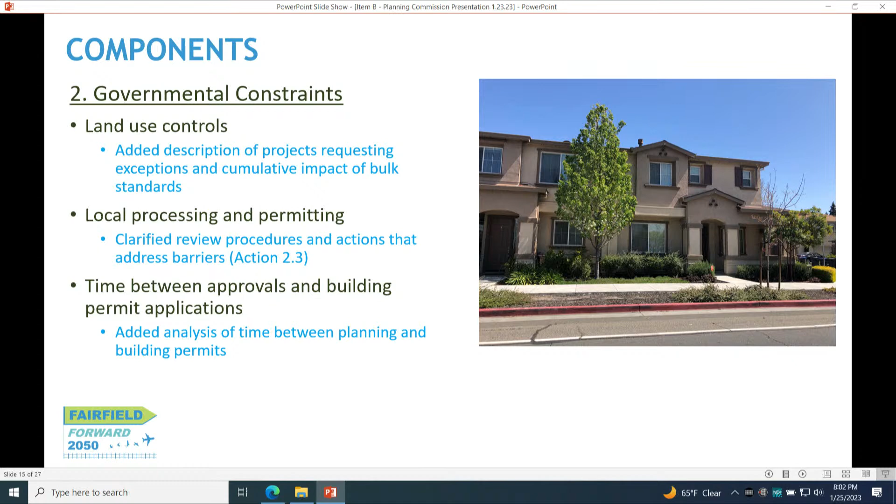Finally, the third area of the letter was around affirmatively furthering fair housing. They requested geographic and numerical targeting for a number of actions. All of those were added. In addition, action 10.2 was added to demonstrate how the Heart of Fairfield specific plan already includes a number of place-based strategies to address areas of greater need, as that does align with areas of lower income, housing burden, et cetera.

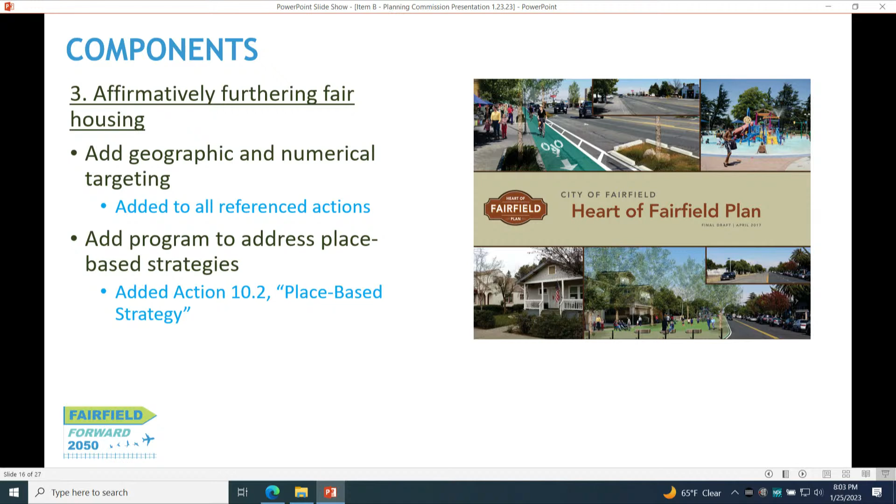Also, as part of that action 10.2, the team is also calling out environmental justice policies that will be added as part of the general plan update that will have the effect of improving quality of life.

The team has developed a negative declaration for the housing element, which states that the project will not have a significant adverse effect on the environment, largely because the plan doesn't actually propose specific development projects. Any rezoning efforts will occur in tandem or following the general plan update, and full environmental impact report for the remainder of the elements will happen simultaneously with that process.

The comment period for this negative declaration ends this Friday. More information on submitting comments for that can be found at fairfieldforward.com.

Staff believes we have an element that addresses all statutory requirements through this consultation with HCD. The housing element and negative declaration will be considered for adoption at the February 7th City Council meeting, and after adoption will be submitted to HCD for their certification review. Tonight we are hoping to receive public input and get the Commission's recommendation to City Council for adoption of the housing element and forwarding it to the California Department of Housing and Community Development for certification.

Before we turn it back over to the Commission, I'll add one item. In the last couple of days, we've received 3 additional comment letters on this final version of the housing element, along with the environmental review document. All three are at the dais here for you tonight. One was from the Sierra Club, which concurred with the statements in the HCD letter we received, essentially affirming that they agree with those comments. As Allison mentioned, we believe we've addressed those.

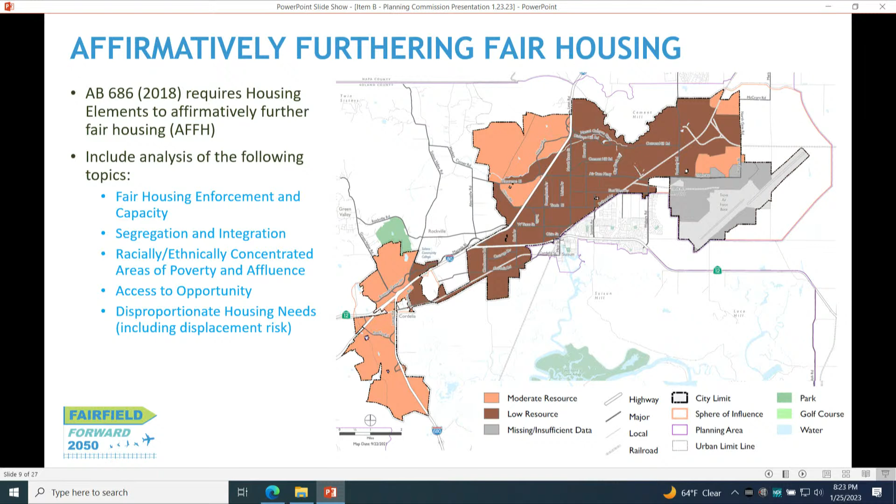As part of the affirmatively furthering fair housing section required by the state, that's where the requirement comes to look at all parts of the city, including Cordelia, and areas that on that map Allison showed as moderate resource. Most of the city is that brown area, but we also need to make sure we're providing it in at least the moderate resource areas per state law. That's why you're seeing some called out in the housing element in the more salmon colored areas—really only a very few areas called out for additional zoning. I'll also note the housing element does not call those sites out for low-income housing as part of section C4; it's actually for moderate income housing.

So just some clarifications. So with that, I don't know, Allison, if there's anything else?

I would just add that we're talking about a total of 3 sites in Cordelia, and in the larger scheme of things there are hundreds of sites included in the inventory, and most of those already include zoning for housing. I want to reiterate that we are trying to balance the state's mandate to affirmatively further fair housing in areas of moderate opportunity, while also improving quality of life in areas of lower economic opportunity. We attempted to balance that with this housing element, while recognizing all the issues we've heard about need for services in Cordelia, which we will absolutely be addressing in the remainder of the elements we'll be picking up very soon.

Allison, thank you so much once again. We will now close the public hearing and turn it back to the commission for their deliberations.

Seeing none, do I have a motion?

I just wanted to make a comment that I appreciate hearing from Mr. Feinstein and Ms. Moore about the guarantee that we're going to look at services before we continue housing. I think that's really important, so I'm glad you publicly stated that. Thank you. Okay, do I have a motion to approve item B?